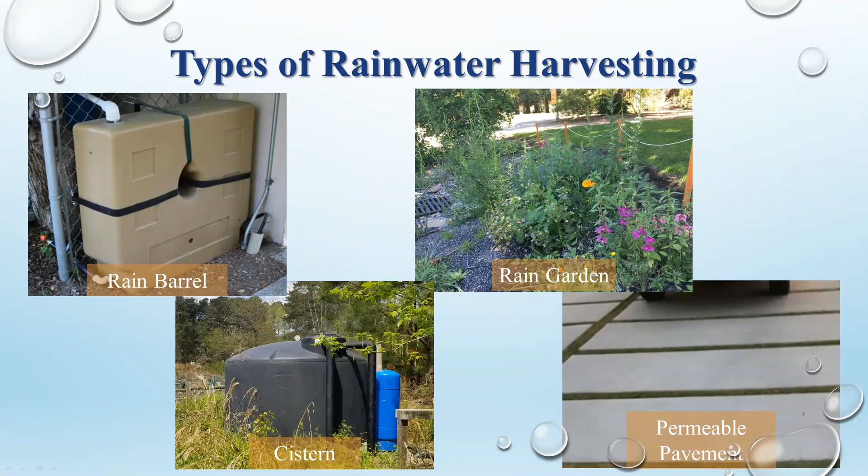It's really common now in parks. In Milpitas, there's a lot of public parks that have this for the walkways. It's also becoming more common for parking spots. It's not really durable enough to be used for roadways, but it's great for driveways. The other option, which you probably have seen a lot of in your neighborhood, is these pavers with built-in spacing, or even people that have decoratively put rocks with spaces between them to give a really artistic look, but allowing that water to sink in. So I'm not going to take a lot of time on permeable paving. It kind of explains itself. It's paving that allows the water to flow through.

When we're using it for municipal needs and we're looking at a lot of water and a large area, it's very engineered. They have layers of drainage rock underneath it. When you're looking for your own home, there are different options available, and just something to think about if you do redo your walkway or your driveway in the future. Some areas do have rebates available, so check with your local area if that's a possibility. Okay, we're gonna head into one of my two favorite rainwater harvesting techniques, rain gardens. Rain gardens are a beautiful way to help mitigate the seasonal flooding by absorbing additional water into the ground.

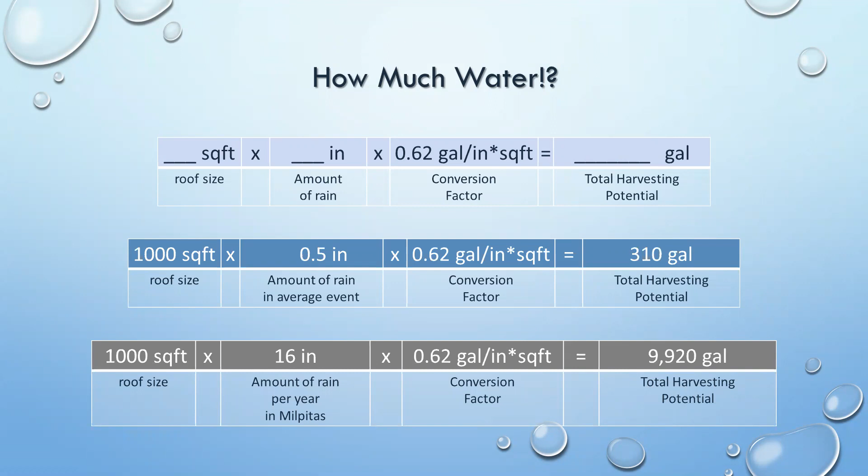It's a wonderful opportunity. The next question people always ask me is, well, I have this type of roof, I have that type of roof. Can I actually capture rainwater from that, or is one roof more efficient than another? So to answer that, there are differences in different roofs, but you can capture rainwater off of any roof. It is easiest if you already have downspouts in place, but it's not impossible to install gutters and downspouts.

The most efficient roof type is tin. I just built a shed this past year and I put a tin roof on it because it was the cheapest, easiest thing for me. And even now we haven't had any rain, but in the morning there's enough dew on my tin roof that it drains into a bucket I have. So I'm already capturing water even now just from condensation overnight, which is kind of incredible. So tin is very efficient.

Tin roofs really aren't common in this area though. So we're looking more at the wooden cedar shingles or shakes, the asphalt shingles, ceramic and clay tiles, rubber roofs, or cement tiles. Those are really the ones we see more around here. And all of those are absolutely great for harvesting rainwater. You do not lose much water. You're probably not going to be able to capture it just from the condensation like you can on a tin roof, but anytime it rains, that water is going to run off and you're going to be able to fill your system.

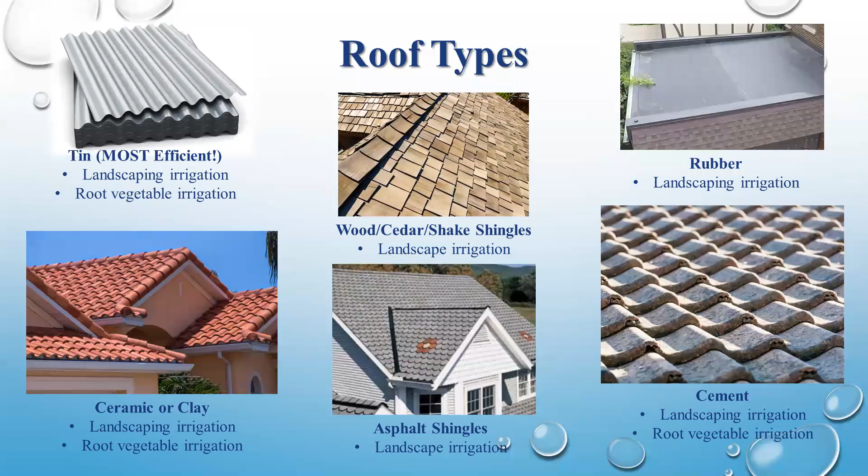So I'm going to move forward onto rain barrels. So rain barrels are, I think, what most people think of when you think of rainwater harvesting. So I'm going to spend most of our time today talking about rain barrels. I'm even going to go through a quick slide-by-slide presentation on how to install one on your home. But we're going to start out basic.

We know that rain barrels are used to capture that runoff off of your roof and store it for later use. We already talked about how great it is for decreasing the need for irrigating with municipal water and reducing all that flooding and the polluted runoff. So we already know all this great stuff about rain barrels. So let's learn a little bit more about the details of using a rain barrel.

The first things you want to consider when choosing your system is your roof size or harvesting potential. So you want to run that equation and put in your own square footage of your roof size and see how many barrels you want. You're always going to be able to put one barrel in, but maybe you want to get more, or you want to get a larger system. Figure out how much water you have access to and what can work.

You want to consider how many downspouts are on your house and how many downspouts you want to hook up to the system. You don't necessarily have to hook up every downspout on your house into a rainwater harvesting system. You can pick and choose the ones you want to use. You want to think about your installation space. You don't want to be blocking your pathway. You want to make sure you have enough room to set this up. There are different types of barrels that can be easier for tighter spaces.

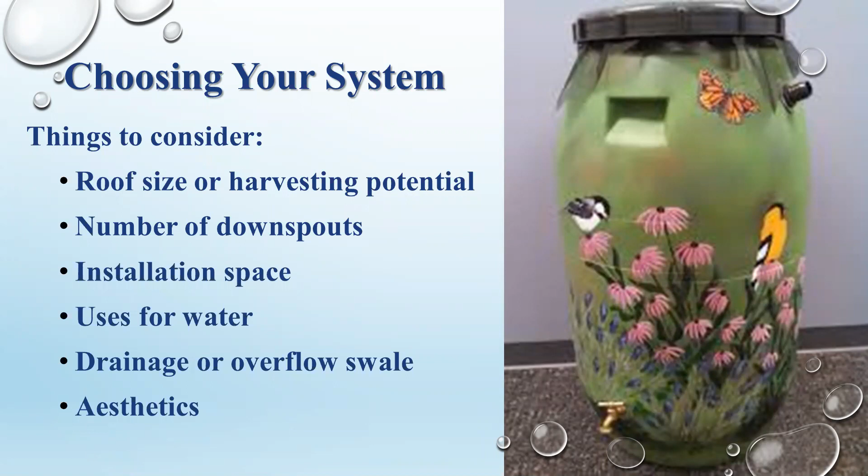Also, it's nice to have something pretty. I personally really like this barrel here. I think someone far more artistic than me did a great job making this recycled olive oil drum look absolutely gorgeous. So think about what's pretty. So we're going to take a look at the anatomy of a rain barrel, and we're going to follow the path of the water as it goes through the system.

And I have a lot of trouble choosing colors. I'm going to try orange, but I already have red on the page, so I'm sorry if it's not the clearest of colors. But I start up here. This is the water coming in the downspout. So we have a downspout coming in, and the first thing that water hits is this leaf eater, and that leaf eater is our first level of protection for our rain barrel. It pulls out all of the big debris. It acts as a mosquito screening.

In the state of California, it is required that the input and overflow have a mesh or screen to keep out larger particulates and bugs. So a leaf eater is a great option for that. This particular barrel actually also has a screen underneath the leaf eater right here. So it has the screen on top and then an internal screen, double layers of protection, so there's no mosquitoes getting into the system.

Then the water flows into our barrel and it fills up the barrel, and we get our fill line up at the top. And at that point, it's always nice to know how much water we have. So the great thing is you can get an accessory called a depth gauge. And you can see in this case, our line is on the top of the green right there. So that is full. We've got a full barrel of water here, which means when more water comes in, it has to go somewhere.

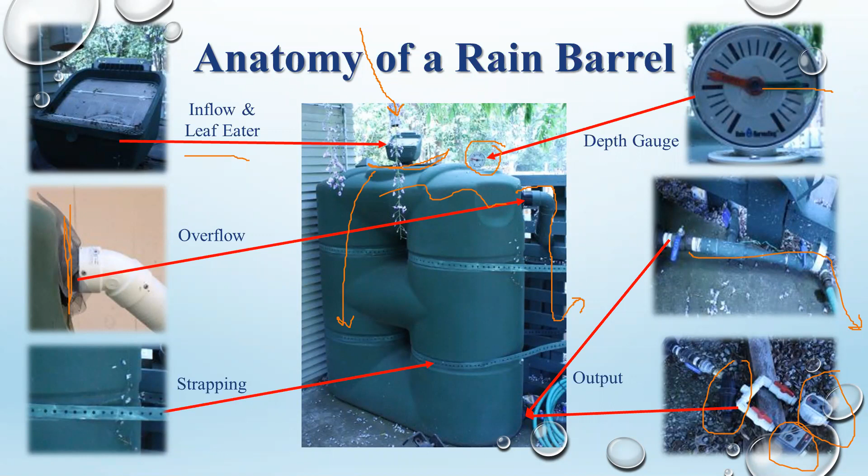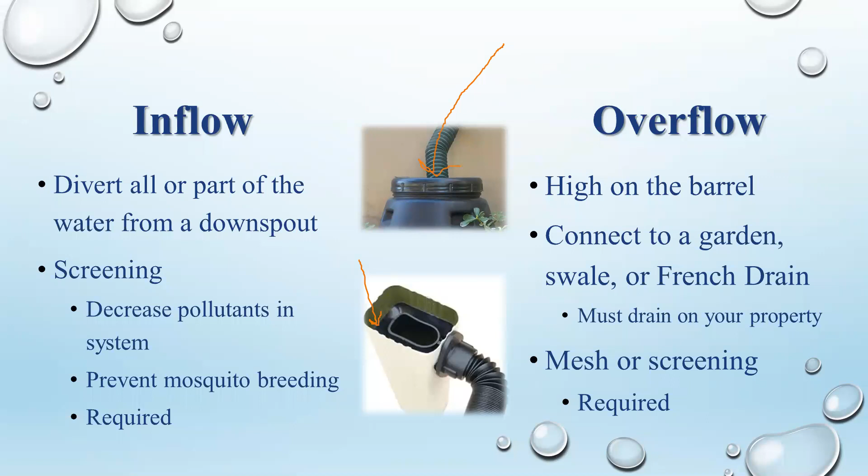So we're going to talk a little bit more about these different parts of the barrel and how they play in. So we've already talked a lot about the inflow and the overflow. These are two different styles. So you can have a full diversion, which means all the water from your pipe comes into your barrel. Or you can have a partial diversion, which is something like this. So the water comes in here, and then it comes down the hose into your barrel.

When your barrel fills, it actually overflows back into the same pipe, comes out here, and goes back down your existing downspout. So this is a really great system, especially if you're only doing a 50-gallon tank or if you're doing a slightly smaller system. Even for the larger systems, it really is efficient because when it rains, the water comes down the sides of your downspout. So it really does capture most of the water. But if you don't have a French drain already installed, it allows you to go back into your existing downspout, so you don't have to worry about that.

In this case, your mesh screening is right here, and it's one piece of screening that is both your inflow and your overflow. For this picture on top, you would have to install an overflow somewhere near the top to allow that extra water to come out.

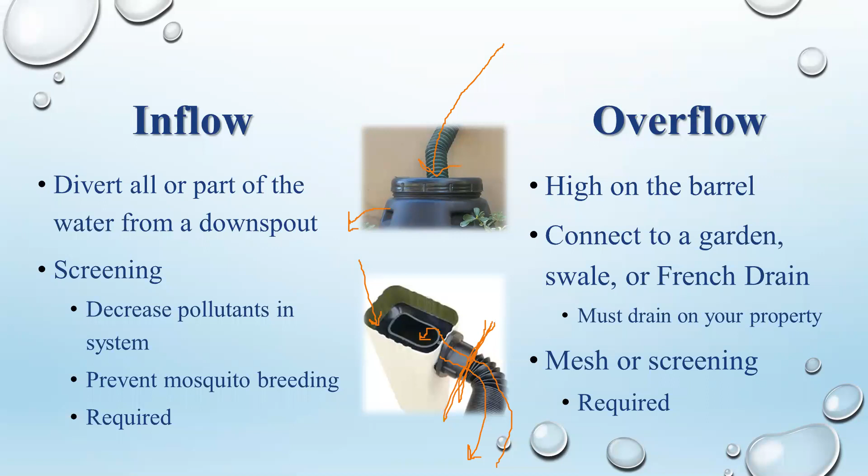So we already talked a little bit about the output and considering how you want to use your water. The main things to think about for your system is that you want to use drip irrigation. It's the most efficient if you're going to have an automated system. With rainwater, once you get over 360 gallons, you can't do spray irrigation without a permit. So the drip irrigation allows you to get up to 5,000 gallons worth of water in your system, which is a lot of water. And you can drip irrigate without needing a permit.

With the drip irrigation, I do recommend putting a filter on your system to get those finer particulates that will be in your barrel. And then basic timers are great, but you need to have something that is called a zero pressure timer or a gravity fed timer. They're specifically designed for systems that don't have a lot of pressure on them.

You can also water with a hose, but keep in mind water seeks its own height. So if you hold the hose higher than your rain barrel, you're not going to have enough pressure for the water to come out. So you need to be able to hose water very low to the ground if you're using a smaller system. Watering cans are great, and running it into a dry creek bed's also great.

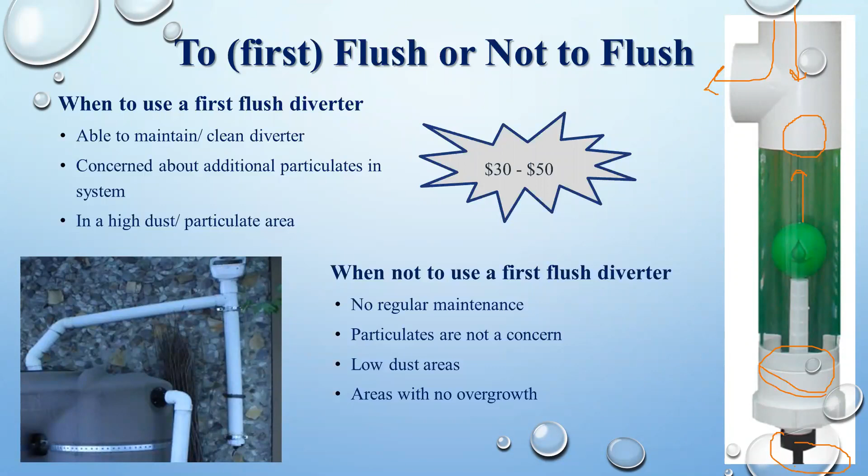Did we have any questions on our first two accessories, Linda? Yes, we do have a question on the drip irrigation system connection. Kim is saying that she has 2 water hogs, and even when they're full, there doesn't seem to be enough pressure to drive the drip. Any best practices for that, or is there a minimum gallon count to really get that drip irrigation working? Oh, that's a great question.

So one of the biggest issues when you have a rain barrel system or a gravity fed system: I talked about the drip timer being specific to it, but all of your drip irrigation lines need to be 0 pressure lines, so specifically designed for gravity fed. The holes are a little bit bigger, and they're designed to water from as little as 20 gallons of water.

If you only have a 50-gallon barrel, when you get under half, you do lose a lot of pressure. The 0 pressure lines will still drip, but you're going to have to run them a little bit longer to get enough water to push out of them. And you need to make sure that the end of your line is closed, because if the end of your line is open, the water is just going to run straight through the end of your line. So hopefully that answered it.

Just having really specific gravity fed irrigation lines and gravity fed irrigation emitters in place, because they are different than the ones you would hook up to a normal municipal line, because your normal municipal water does have a lot of pressure behind it that you're not going to have with a gravity system. But the bigger you get, the more pressure you have, and we're going to talk about that when we start talking about the different types of barrels.

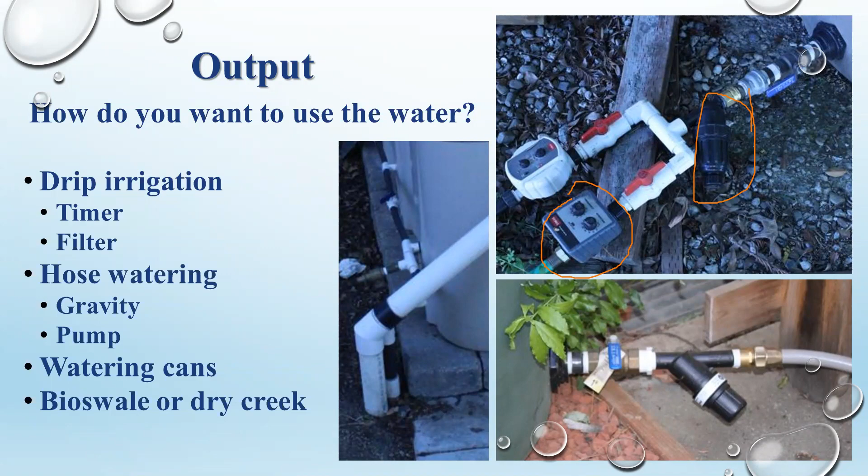Honestly, if your tanks are easily accessible, you can just go up to your tank and tap the side of it. And when it goes from a very solid sound to a very hollow sound, that is the level your water's at. So a depth gauge may not always be necessary. I tend to install them at preschools or schools where the kids want to be able to check on their system regularly and see how they're doing.

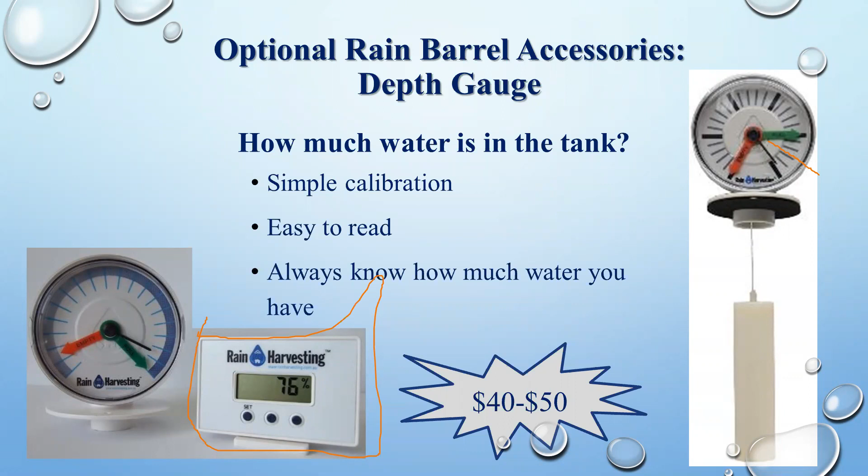Anytime there is water coming into the pump and a need for water to come out of the pump, it will turn on if it's plugged in. So you can either plug a hose in yourself and then plug in the pump and turn on the hose and it's going to run, or you can set it up to a timed drip irrigation. When that timer opens the valve, the pump will run to run the irrigation and then it will close.

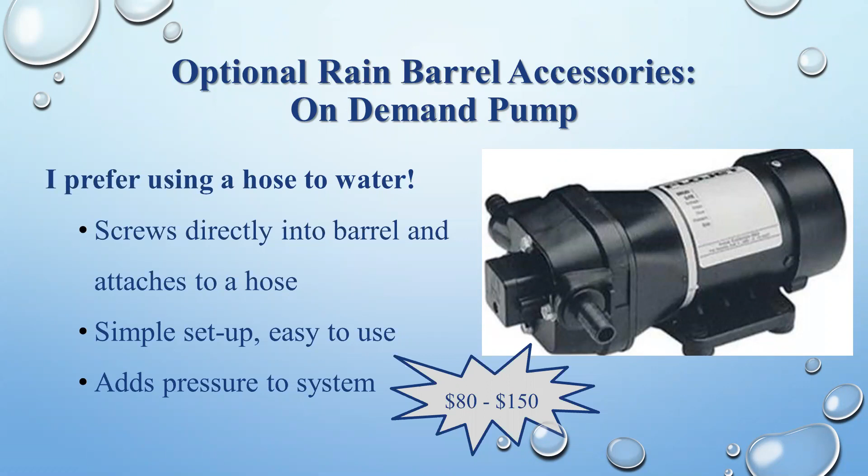These pumps are not weatherproof on the outside, so you do have to store them somewhere weatherproof or build a casing for them. Not a hard thing to do. There are casings you can buy specifically designed for this as well. I've just bought toolboxes and drilled a hole and sealed with rubber cement around the pipe so that I was all set up to store it outside and keep it plugged into the wall. And they work really, really efficiently.

Cisterns just allow you to capture more water. They have that higher capacity. So that way it's going to last longer in the dry season. You may not run out in the summer. You're going to use even less municipal water. You're going to get that higher pressure for your gravity systems, but you really need to think about where you're going to put it because it's much heavier.

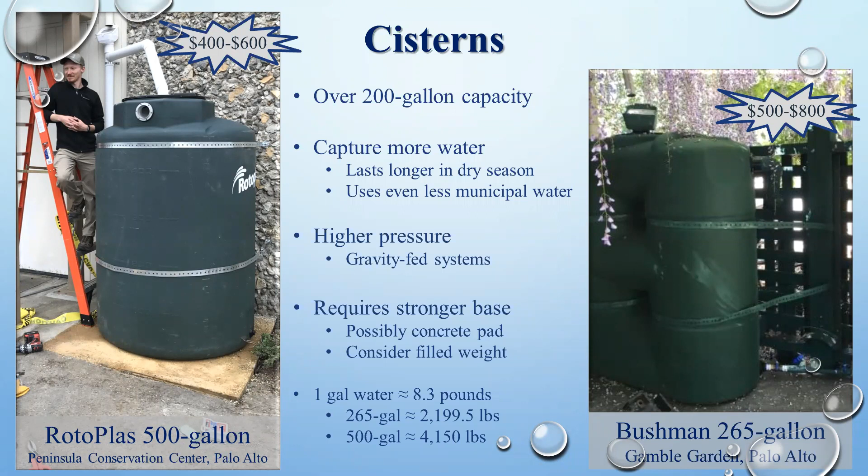When you get into the slim lines, the cost goes up significantly. You're looking a little bit more like $2 or $2.50 per gallon because you're getting that custom style, that thinner design. The other option also is a below ground cistern. These do require permits. You are looking at a more complicated system. You absolutely have to have a pump. This is a more engineered system. This would be installed by a contractor. You're not going to install this on your own home.

And these cost more, but they can be quite large and really take over your system. And if you're already going through the process of having a contractor and getting a permit, you can get it plumbed into your toilets. You can get it hooked in to use it more with your house because you're already going through that permitting process.

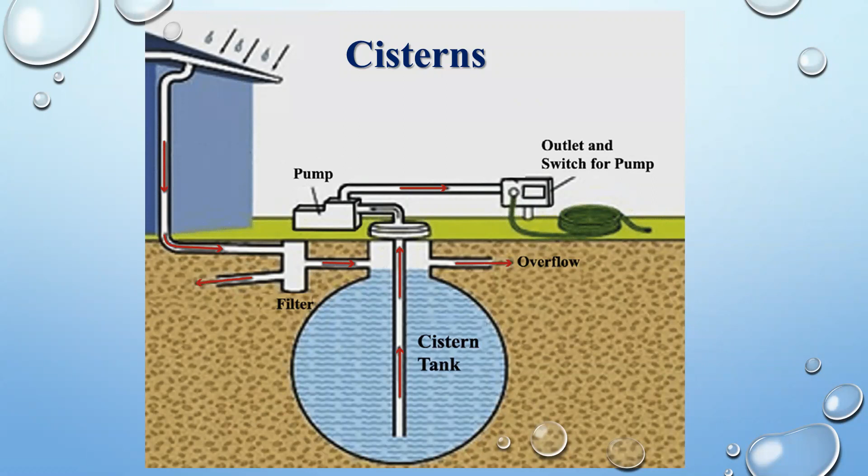One of the great ways that you can actually get a huge water capacity without looking at cisterns is by daisy chaining. So you can take any smaller size barrel and you can daisy chain them together to get a larger system. You can even daisy chain cisterns together to get a really large system. It's really easy to add on additional barrels, and this can give you better pressure for watering. You can even use it to bridge the gap from a downspout to a garden by running the barrels along your wall or your fence. And again, most cisterns can be daisy chained.

One of my favorite types of barrels is doing a wine barrel conversion. These are great for DIY enthusiasts. You get that really nice garden rustic look, and you're recycling, which is always great. And a lot of times if you check with a local winery, sometimes they have older ones they're ready to get rid of. They can't use them anymore. So you might be able to get a really good deal to get these cheaper. Sometimes they're like $60 to $80, and sometimes you can get them for free. These were both donated because I was doing installations for a nonprofit.

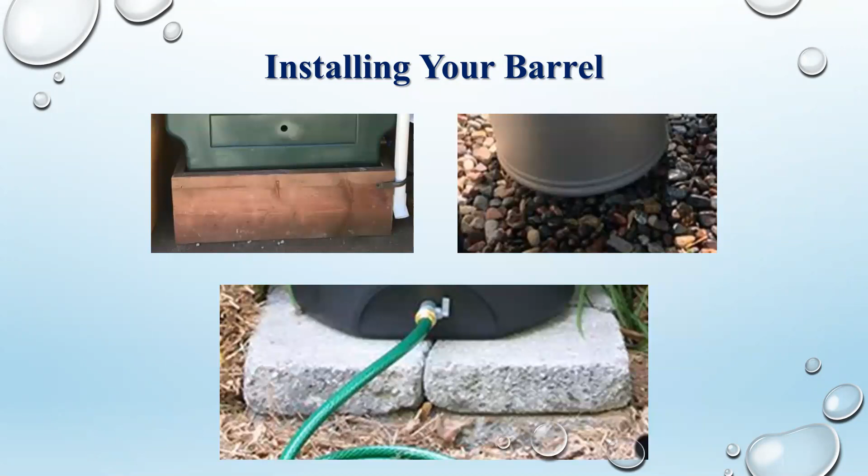And then the first step is going to be installing the bottom. And we're going to also look at installing an input pipe. So we're looking at the output and the input. So for the input, you want to make sure that you are just a little bit above the height of your barrel and mark where you need to be. And it's going to give you really precise instructions on where to cut on your downspout.

You're going to use the hole saw provided to drill right into your downspout. And then there's 2 screws that come with it that can be screwed in. And then you just pinch and squeeze the rubber diverter and put it into the hole in your downspout. If you ever decide to remove your barrel, or if you are installing barrels somewhere other than the Bay Area where you actually have a real winter and you need to disconnect for the cold, you're going to look at maybe putting that stopper on. But otherwise, that's a great thing to just keep in your garage or storage area so that you can always have that if you ever need to remove your downspout.

I have seen people that live in apartments get permission to do this on their balconies to water their houseplants. And they installed something like this on their balcony, just a 50-gallon barrel. And then when they moved out, they just got permission and put the stopper back in and left it. And the landlord was okay with that. So it's always good to keep that stopper.

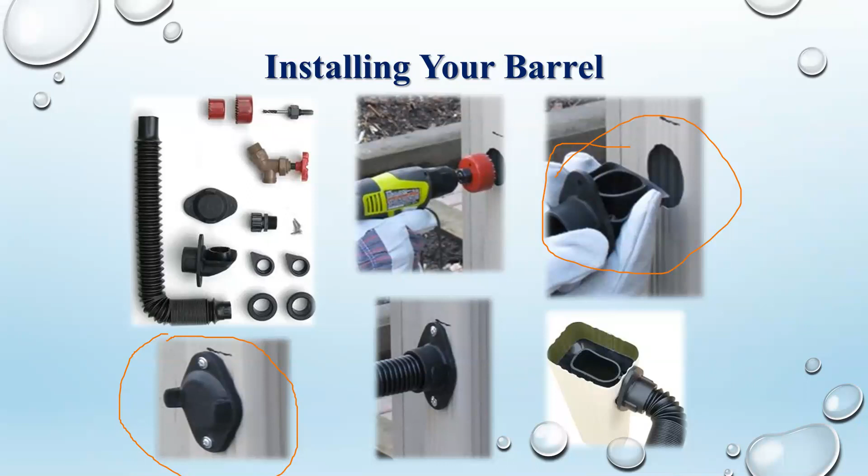So now we have that input in, we got our hose hooked up. So we're gonna look at the base. So it'll come with 2 little rubber gaskets here, and those are threaded. And you just kind of pinch them into this U shape and then put them into the hole.

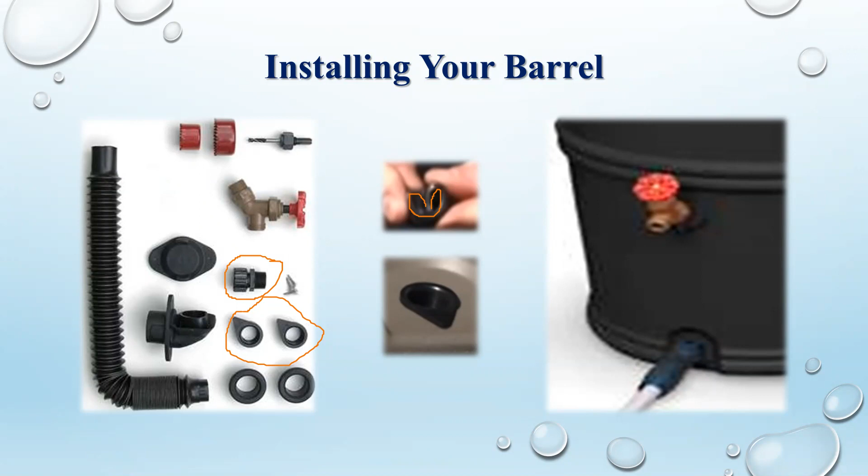The holes are pre-drilled at this point on most barrels, and you'll just plug in your spigot, your hose, whatever you're going to put in there. The kits usually come with a cap in case you don't want to plug anything in, you just want to have it capped on the bottom. You can do that as well. I usually like to put a ball valve so that it's easy to turn it on and off and disconnect or drain my system. And you'll just kind of push that into the hole and you're all set.

The top one you do normally need to drill. That's because a lot of these barrels have multiple options on where you can put the top one. And you may be running a different overflow or a connector on the top to daisy chain as well. So they have different options. So you'll use the smaller drill bit, you'll drill the hole, and then these bottom rubber gaskets go right in. You can even see there's a little notch there to hold the drill in place to make it a little easier to drill the hole.

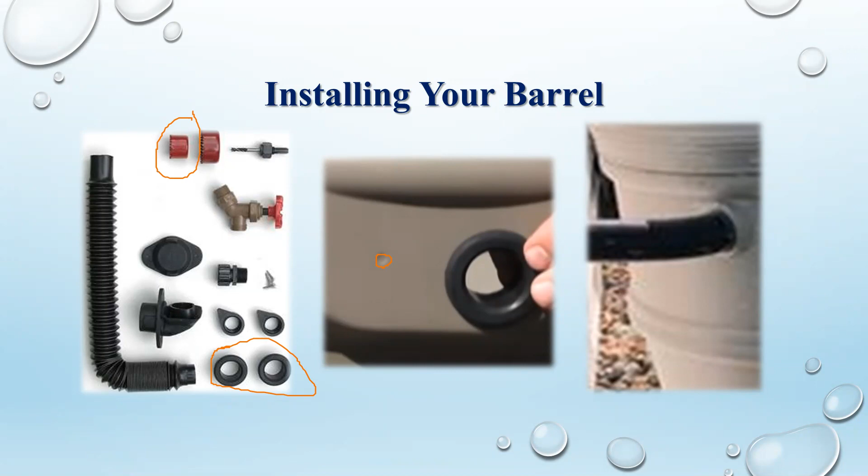If you're not comfortable doing the drilling, I'm sure you know someone who is comfortable with a power drill and will be able to help you out. These are very basic DIY systems. Once it's installed with this particular system, you have the option to either have the barrel closed on top or to have the planter. Either way, there's a little mesh screen at the top so that no bugs can come in. And always make sure your system is fully closed. So I usually put a screw through the side right here just to make sure that that lid stays on and it's not going to be opened and allow bugs in.

So that's kind of the basics of installing a system. Each system you get will have its own kit and very clear instructions. If you go with something like Blue Barrel, they have a series on their website that shows you exactly how to install absolutely everything, step-by-step videos. So each product has their own style and system, and they do show you how to do it on your own. So it's very approachable, very easy to do this yourself.

Maintaining your rain barrels, it's very, very basic. Ideally, once a month, get out there, check everything over, empty all the screens, and double check it. You want to clean your gutters. You should be doing this anyway, but you definitely want to make sure your gutters are cleared out. And you want to empty that first flush diverter. And once a year, this is actually a legal requirement for the plumbing code, visually inspect all your valves and components.

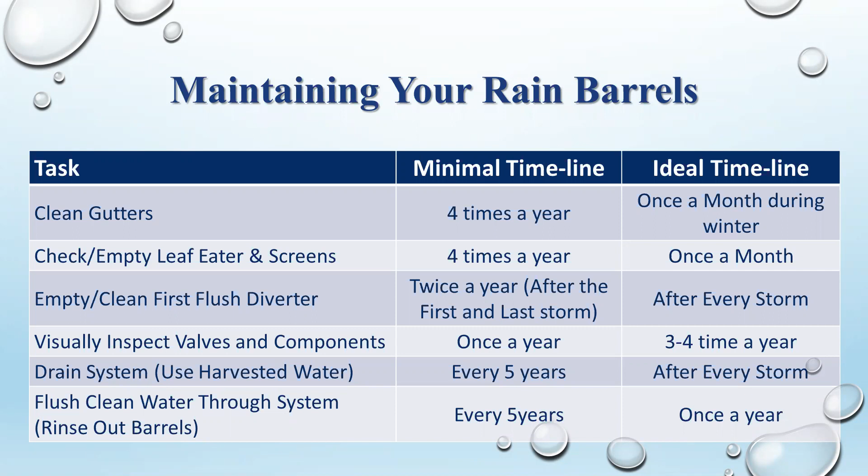And most importantly, let's use that water. So it's really important to use your water regularly. Like I said, it's great to empty your barrel between storms. We really want to make sure that water gets a chance to soak into the ground. You can use a pump or let gravity do all the work. It's great for landscape ponds or bird baths, as long as you make sure those are drained regularly so they don't become a breeding ground. Great for washing tools. You want to water your garden, your landscaping. It's great for house plants.

Really just great to get that water in the ground and not have it be part of that first giant rush of water coming off of every house and going straight into our creeks, carrying all of those pollutants along with it. And again, as we talked about earlier, you can connect it to toilets for flushing, but you do need a permit to do that. So it is a bigger step, and you would have a general contractor come out and get that permit for you and generally do the full installation.

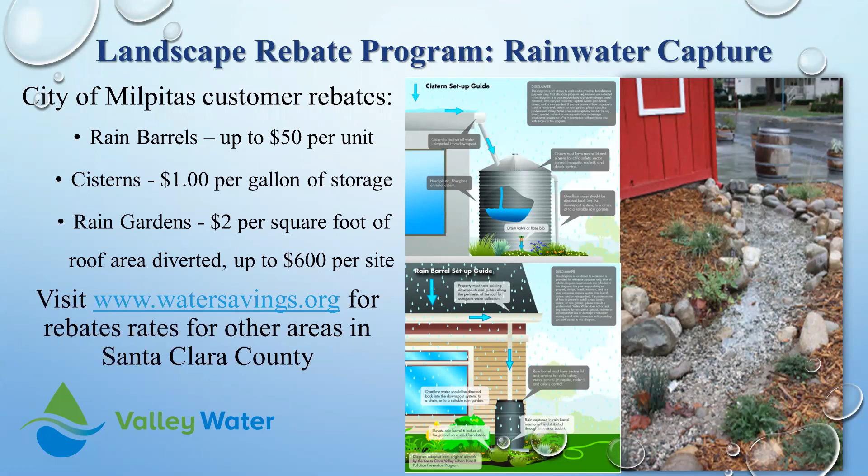And then just a little more background on the rebates. You need to know that you do need to submit an application and get it approved before actually purchasing your rain barrel or cistern. So make sure that you just submit the application. It's pretty quick and easy to do, and Valley Water does have a pretty quick turnaround, especially for the rainwater capture rebates, but make sure you submit that before you buy your actual system. And feel free to reach out to us if you have any questions, but really hope that you guys are able to take part in some of our rebate programs.